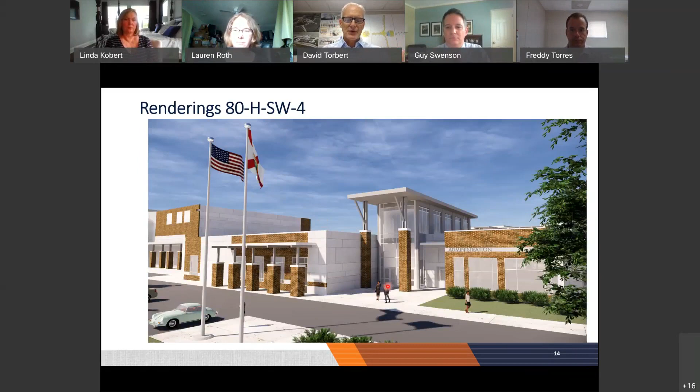The next series of slides are a little closer and look at some of the elements. This first one is a little closer look at that front door area there. You can see that entry tower there, the auditorium kind of in the background. The next slide kind of comes around the corner of the campus, and this is the front door of the auditorium that faces that staff parking area. So you can see a very prominent public entry there for after hours events.

The next slide goes down to the other end of the campus and shows kind of that public entryway or entry element for the new gymnasium, again, for that ease of after hours entry for games and events that happen in the gymnasium.

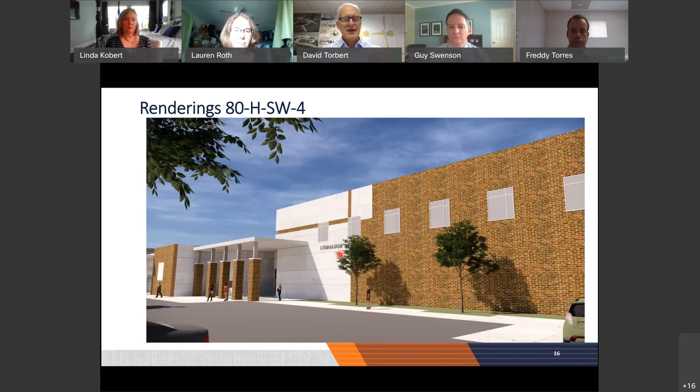If I could show you a more detailed floor plan, what you would see, particularly in that classroom academic building where all the classrooms and labs are located, you'd see that the new campus is going to have 75 classrooms, 9 vocational, CTE programs like culinary arts. It's going to have 8 skills labs, 16 science labs, and 3 art labs all within that classroom building.

In addition, you'd be able to see that the auditorium is going to be able to seat 852 people. You'd be able to see that the gymnasium can seat just over 1,800 folks. And so you'd see that there's quite a large array of amenities and features incorporated in this overall plan.

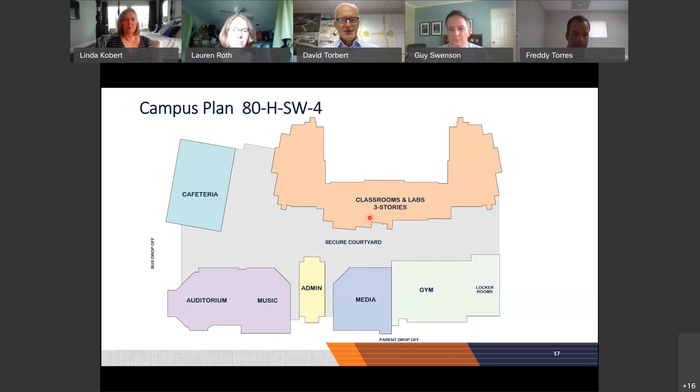Outdoor courts. Again, just to reiterate on safety and security, the secure courtyard design, the single secure entry point, and the security systems, card readers - all of those are elements that will be in this school.

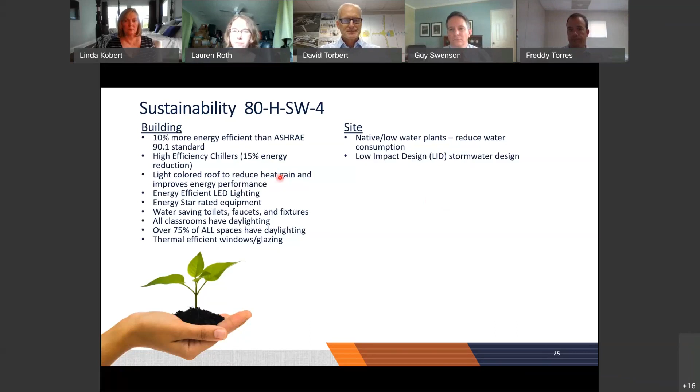So I think with that, I'm going to turn it over to Richard Rodriguez and his team from Pirtle Construction, and they're going to tell you a little bit about what's going on from a construction standpoint.

Yeah, thanks, Dave. Pirtle Construction is really proud to be part of the team working alongside Schenkel Schultz for OCPS to bring this exciting project to this community. We've been working with OCPS for a number of years and are happy to do this again. Love to share the progress that we've made to date. With me today, I bring Jason Krasunas, our Senior Project Manager, and Freddy Torres, our on-site project manager.

All right, good afternoon. I will, much like David, discuss the design kind of from a global scale down to a more specific one. I'm roughly going to be doing the same thing, but on the construction side of things.

So just speaking in general terms of some of the things with the project, we have work hours on site roughly from 6 a.m. to 6 p.m., Monday through Saturday. Currently, our deliveries are all being handled through Fenton Road, which is actually opposite of the new connector road that's being completed right now. This actually helps out a lot with the construction and avoiding any impact to the community.

As one good example of what we had to do for the project thus far, we had to bring the elevation up quite a bit, and in doing so we had to bring in 350,000 cubic yards of fill, which amounts to roughly 22,000 trucks in and out of the project site. We do work very closely with local law enforcement as well as the community, making sure we're not impacting them, doing things such as early morning pour notices and so forth.

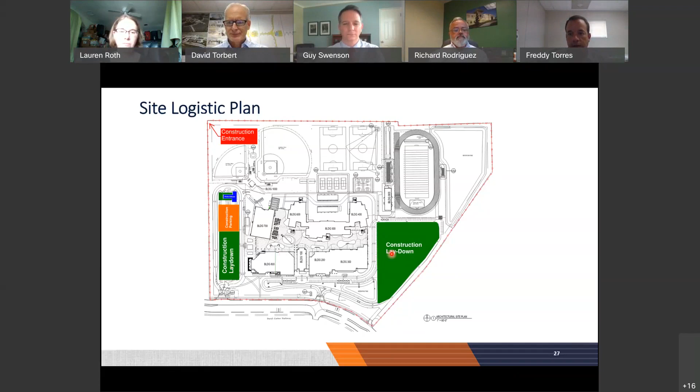Here are some specific items for the project. As I mentioned, the notice to proceed started in September 2019 when we moved into the site clearing portion of the project.

Tilt wall panels, which are basically all the walls of the building, we started and completed this past May. You'll see a lot of this in some of the aerials coming up, and some detailed pictures as well.

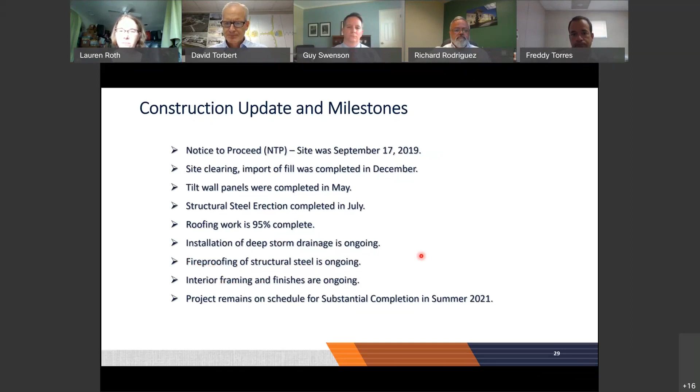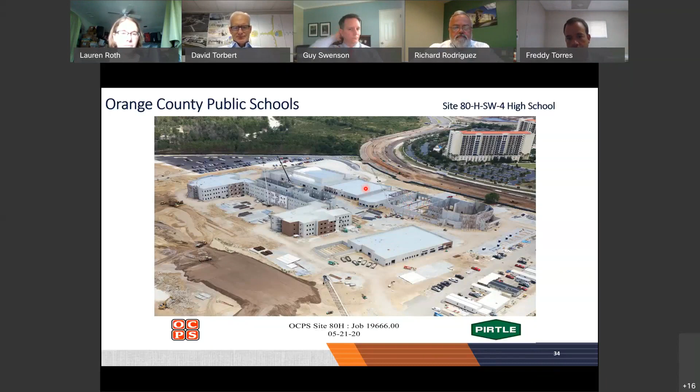We did a lot of the concrete pours at night and very early mornings to limit any issues we may have with concrete not arriving to the project on time, as well as curing times in the hot Florida weather that we have.

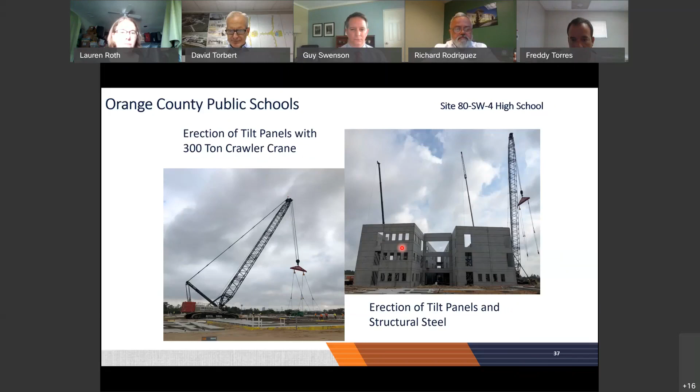This one you see here on the right is actually the classroom building, which, as I mentioned previously, we had started first. And here are some structural steel pictures of everything being tied together, all those walls being secured in place.

Held in place first by some shoring, which is some of these diagonal poles you see here, until the structure is completely in place and signed off by the engineers of record and material testing people. Then we are allowed to remove some of this shoring.

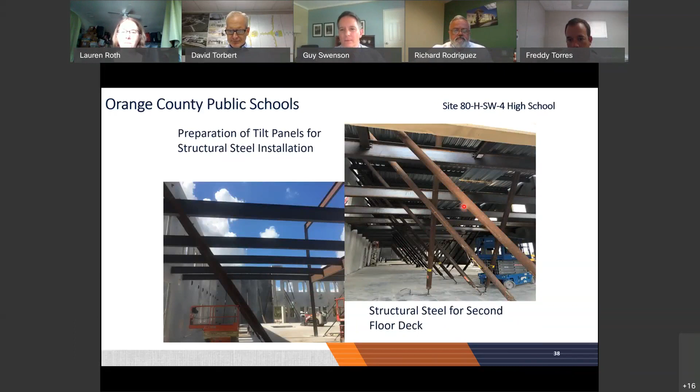Just some other little details not mentioned in any of the slides. At this point, we've also brought in our chillers for the HVAC and air conditioning, and all that's scheduled to start within the next few months. We expect to have cold air blowing just before November to start moving forward with some of the finishes in the building. And lastly, I'll leave off with probably the third reiteration that we are currently on schedule to open up for the summer of 2021.

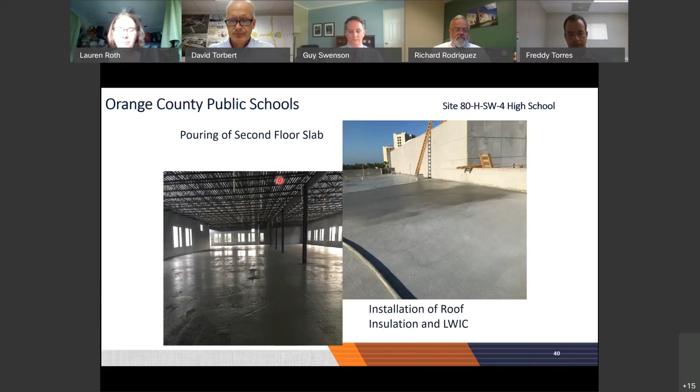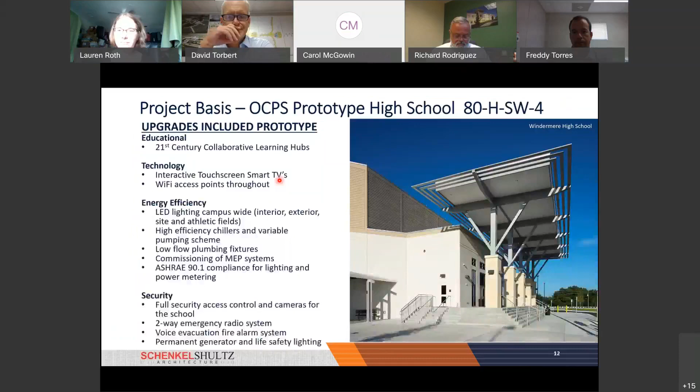All of this is posted on ocps.net. Scroll down in the middle of the page and you'll see enrollment. Click on that, and on the left side you'll see school rezonings. We have the PowerPoint we showed in the spring with all the options, and that is what we will go through at our community meeting and answer any of your questions.

I did see a couple of questions about ninth grade or seniors. All our high schools open with grades 9, 10, and 11 only. All students who will be a senior in the year 21-22 will remain at their current high school and graduate with their buddies there. If you're a 9th, 10th, or 11th grader, the expectation is that you will go to the new school. There are always some exceptions to that, and we have a few transfers that can help us with individual situations with families.

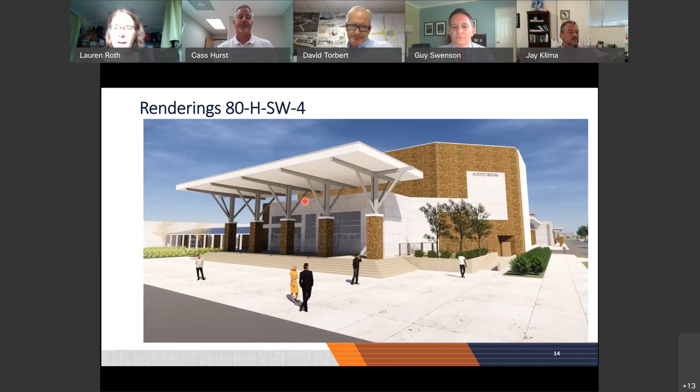Yeah, Freddy, if you could show where that is, that would be super helpful. So the portion from Palm Parkway to the school entrance by September. The remaining section connecting to Apopka Vineland is slated to be complete by the summer of 2021.

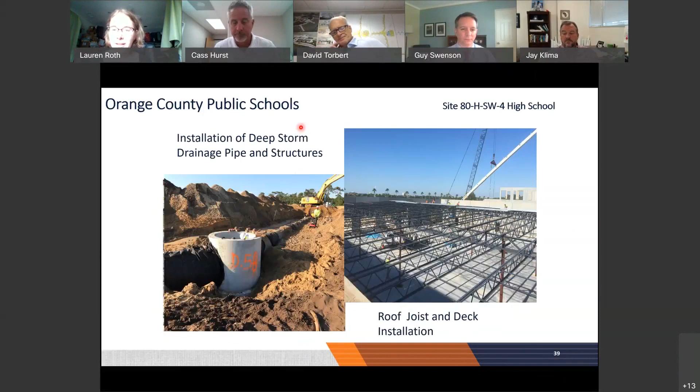I think, Freddy, we need the site plan from toward the beginning, unless you had a different slide in mind, but yeah, if you could show that. There's a question about the storm drainage, where is it going? There is a wet retention pond being constructed as part of the project, located in the northeast corner of the property. Freddy, when you get to the slide you're looking for, just pop in.

Thank you, David. Just back to the drainage. There was a further answer to that. The storm piping, the storm water is all going to one of two dry retention ponds on the site, and any discharge from the site will be at the northeast corner.

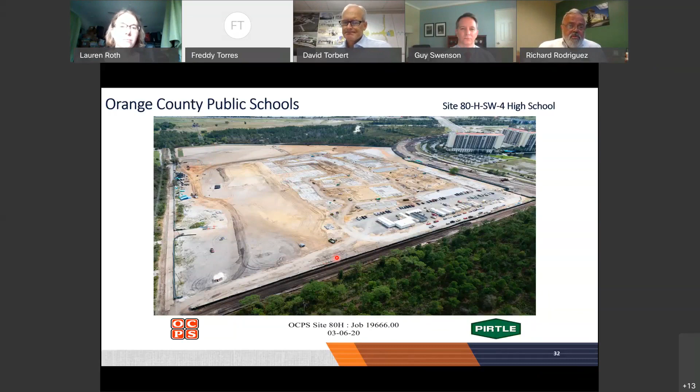There's a question whether there will be an entrance off of Apopka Vineland. There are no direct entrances to the high school from Apopka Vineland. The only access is from Daryl Carter Parkway. Another question: Daryl Carter Parkway will connect to Apopka Vineland by the opening of school, so technically there will be access. You'll come from Apopka Vineland down Daryl Carter, and then you can access the school that way.

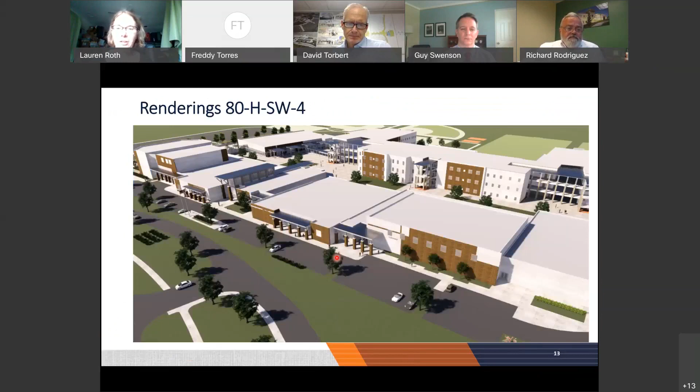Thank you, Richard. It's a left turn in at the light that Jay explained earlier. Gotcha, okay.

And there's another question about storm drainage, whether it'll be going into the residential area, and the answer was that the discharge from the high school will drain to Big Sand Lake eventually.

There's a question about whether the public will have a say in the zoning. Again, yes, the zoning is going on right now. You can actually go on to the OCPS website and look at the school rezonings, and there's a place where you can click to give your feedback to the two maps that have been posted. There will be a hearing about that specific issue by the Student Enrollment Department in September.

This one's going to be for you again, Guy. There's a question about computer concentration. Yes, while we're still discussing curriculum options, we will have a full slate of computer education at the new school.

Thank you very much. There was a question about whether there'll be a light at, I believe, Daryl Carter and Apopka Vineland. It said the new road, so I assume that's what the question is. And yes, there will be a light at Daryl Carter and Apopka Vineland. Yeah, there you go. Thanks, Freddy, for showing that.

Was there someone else who wanted to weigh in on that from the panel? There was a follow-up question on that maybe Jay, you can help with, wanting to know how many directions it'll be signalized in.

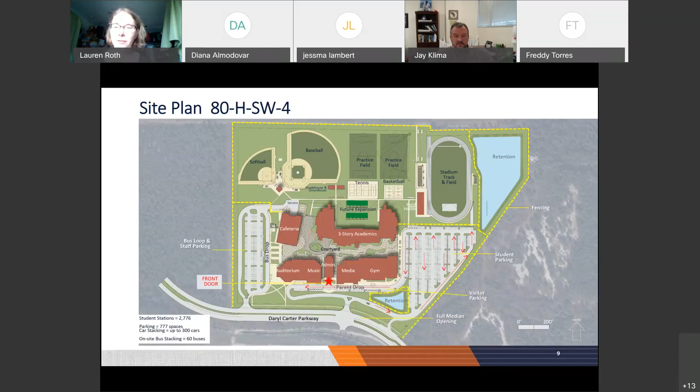There's a question about the closest walking entrance to Apopka Vineland. Walkers coming in from Apopka Vineland would enter the site just to the east of the bus loop entrance. So if we could get a version that shows that, Freddy, the walkers will be coming in just to the east of the bus loop entrance.

There's a question about the area behind the school. The area to the north of the school site is the Dr. Phillips Park. If that's not what the question was referring to, please chime in again, but the Dr. Phillips Community Park is immediately to the north.

There's a question that got a little garbled. Oh, go ahead, I'm sorry, Lauren.

There's a development just north of the school, a residential development, possibly commencing construction in the next year or so. It's going through Orange County's review process, and once it gets approval from the Board of County Commissioners, the subdivision will commence construction. West of the school, there's another development that is more mixed use with some commercial and office uses, and that includes the old Fenton Road, which was vacated and now belongs to a private developer.

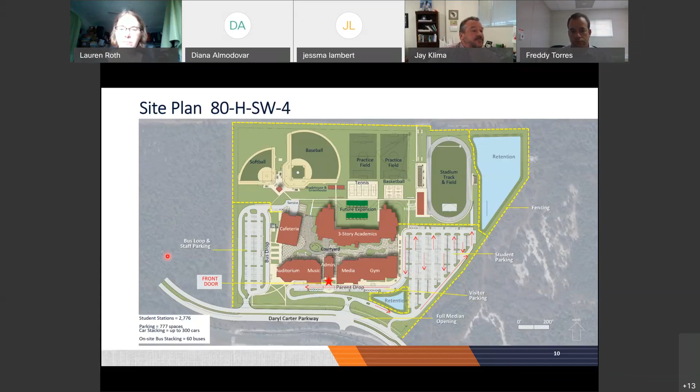Okay, that's correct. The only thing that we're getting from them is a pedestrian connection for any students coming from their project, but that's limited to students only.

Okay, there's a question: how is this school going to relieve the congestion for Freedom High School? It'll relieve congestion because a number of students who are currently zoned for Freedom High School will be zoned for this school, so there will be fewer students at Freedom High School. Same thing for Dr. Phillips.

There's a question: why weren't more resources allocated to Freedom High School? I'm not quite sure what that question means. Funds do travel with a student, but Freedom and Dr. Phillips are both very overcrowded, so we're building a new school to accommodate those students. OCPS doesn't like to have schools operating well over their capacity - it's a strain on the school, and it also means all those students are packed into a campus that's meant for fewer students.

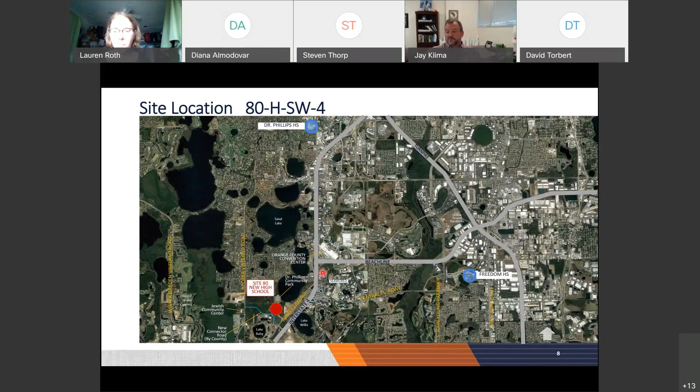Diana, I think this question is going to be for you. Someone's asking about the Publix someone else referred to, where that is, and I'm not familiar. Could you explain that?

I'm trying to find out where exactly that Publix will be. I know there is one planned in the commercial area. I believe it's closer to the Apopka Vineland Daryl Carter intersection, but I'm trying to find the drawing to show here online. So I'm almost positive that it's going to be close to the Apopka Vineland and Daryl Carter intersection. Okay, thank you.

And someone did just write in - whoa, that is loud. I'm very sorry about that.

Okay, so there was a question about this that you did answer, Diana. They were just clarifying that they were interested in the area between Daryl Carter and Fenton, that's residential, correct? Am I remembering correctly? That's what you said?

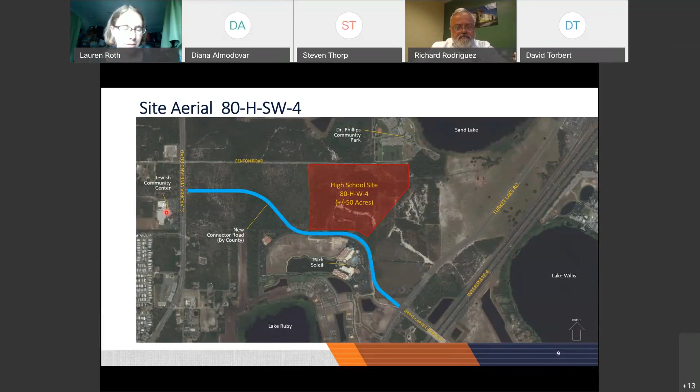Now, when you go a little bit further to the west, fronting Apopka Vineland Road, north of Fenton and south of Fenton, that's where the commercial is going to come in. The Publix and strip mall, retail, that's where that intense use is going to come in. But right north of the school and west to a certain point, you will have residential uses. Thank you so much for clarifying that.

Okay, and Jay or Steven, there's a question again about the timing of Daryl Carter, when it'll be complete between Apopka, Vineland, and Turkey Lake. Or Diana, I don't know who wants to answer.

There were certain commitments made to the school board on having their lanes open to the school and the utilities. Those, we are all on target. And the construction of Daryl Carter is all on schedule, just as we had agreed upon. Last I checked, everything is going on schedule.

Jay, you mentioned earlier that according to your coordination with Orange County, it was going to be open in 2021, summer of 2021. Was that what you mentioned earlier? Yeah, that was for the remaining section getting to Apopka Vineland. That's right, what I understood anyway. Is that correct? That's my understanding, yeah.

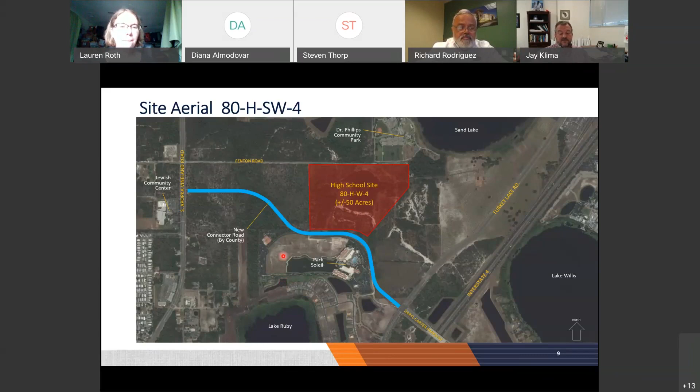I'm here, Lauren. Thank you. I just want to thank everyone for attending. This is going to be a great community school based on the attendance that we've had at all of our community meetings. Bodes well for us. We're very excited about what's coming up, the naming of the school, the mascots, all of that's going to come from the community.

So don't hesitate to contact me if you have any questions at all. Contact your new principal, Guy Swenson. And of course, Lauren is phenomenal about getting you all the information that you need. And if we don't have the answers, we'll find them for you. So thank you, everyone. Thank you to all the panelists for being here and being available to the community as well. Great job, Lauren.